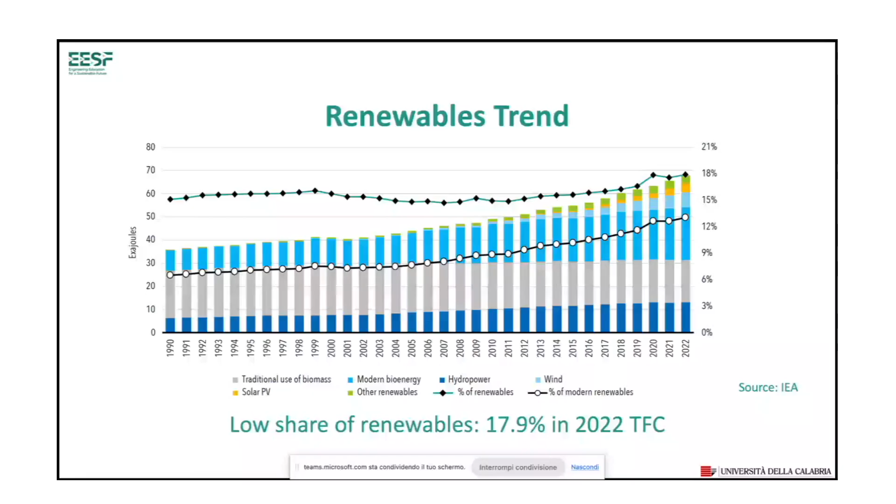In this context, the global contribution of renewable sources in final consumption is greatest for electric generation and corresponds to about 30% for electricity, while heat represents the largest energy end use worldwide, accounting for half of global final energy consumption.

But the sector remains heavily dependent on fossil fuels that satisfy about 80% of the global thermal demand, while renewable sources reach about 21%, and traditional uses of biomass correspond to more than half of this percentage.

The transport sector is the end-use sector with the lowest renewable energy penetration, corresponding to only 4% of final energy consumption in 2022. And in this context, liquid biofuels provide 90% of renewable energy consumed for transport, with most of the remainder coming from renewable electricity for vehicles and trains.

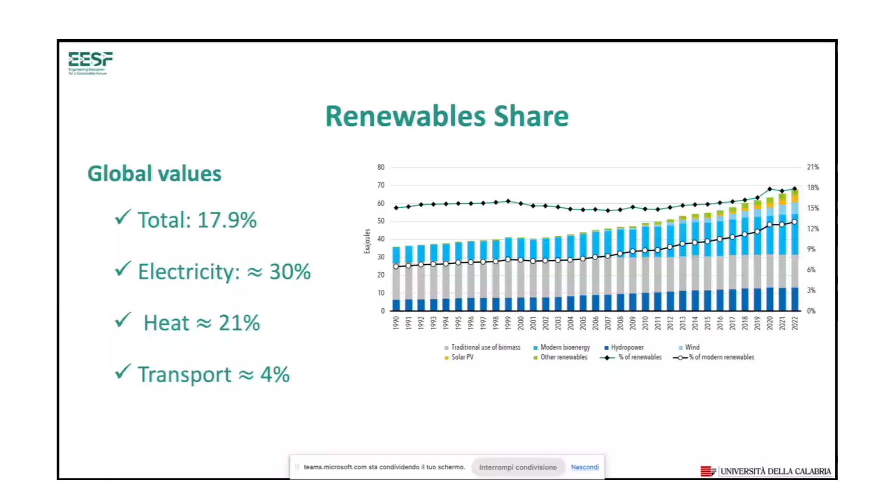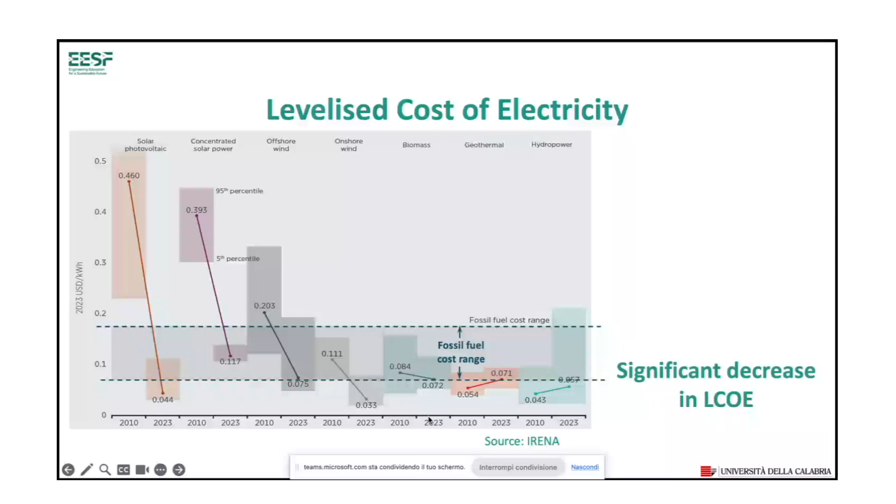And this other slide, always from IRENA, confirms that the 2022 fossil fuel price crisis has shown the economic and security advantages of renewable power generation. And the last years have registered, in this case, among the highest rises in the competitiveness of renewables, as visible in this slide.

Just as an example, in 2010, if we consider onshore wind, the levelized cost of electricity was about 126% higher than the corresponding lowest value of fossil fuel-fired power plant production, while in 2023, the worldwide levelized cost of a new onshore wind project was about 67% lower than the cheapest fossil fuel. This is the fossil fuel cost range in the period that we are considering, between 2010 and 2023. And it is interesting to notice this significant decrease in terms of cost.

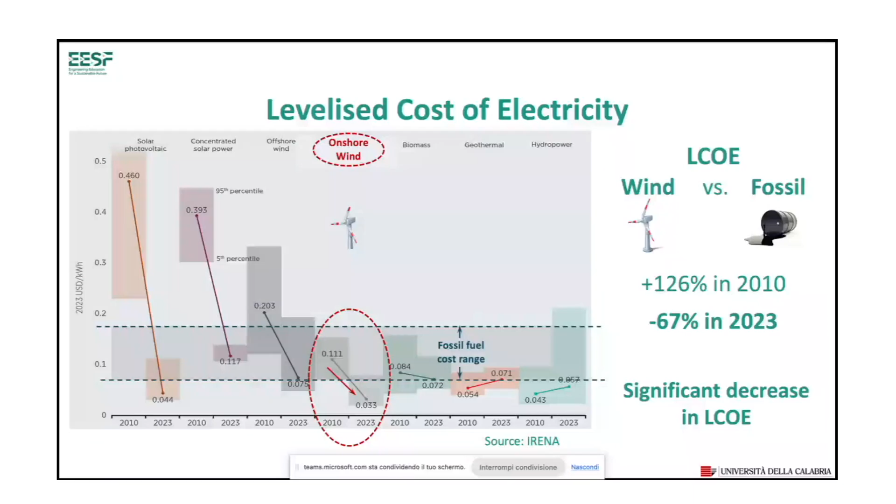And similar results are visible for photovoltaic systems that have reached higher improvement. We move from costs that were about 400% more expensive, this is the value corresponding to the minimum values of a fossil-fired solution, and now they are about 56% cheaper than the lowest fossil fuel system in 2023.

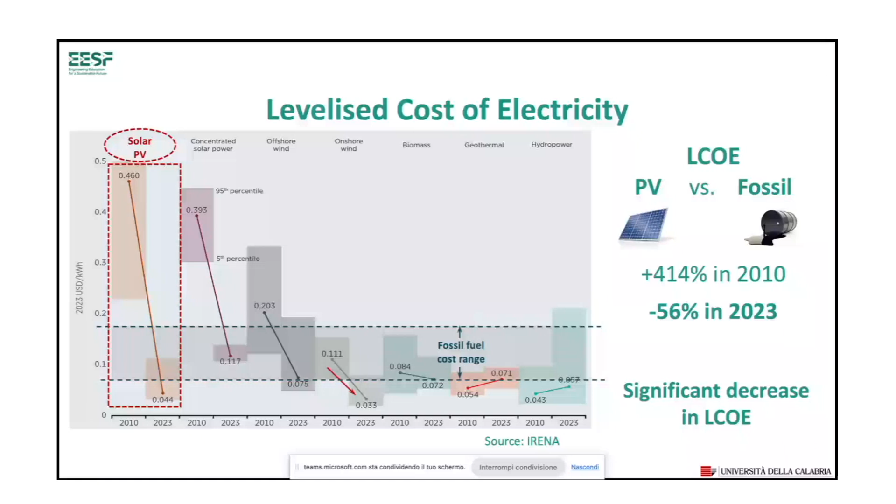And the results highlight also that renewable sources reduce the economic cost of exposure to volatile fossil fuel prices, reducing the need for traditional fossil sources and their import. For 2023, the renewable power deployed globally since 2000 saved about 500 billion US dollars in fuel costs in the electricity sector, with the main share from Asia with about 200 billion and Europe with about 90 billion. And the main energy comes from onshore wind and hydropower.

As already introduced, the second pillar to promote a proper and effective energy transition and to guarantee a sustainable and green future is based on increasing energy efficiency. Energy efficiency, in fact, reduces overall energy consumption and is then crucial to achieving the climate ambition, enhancing present and future energy security and affordability. Saving energy represents the most cost-effective solution for a more climate-friendly energy system.

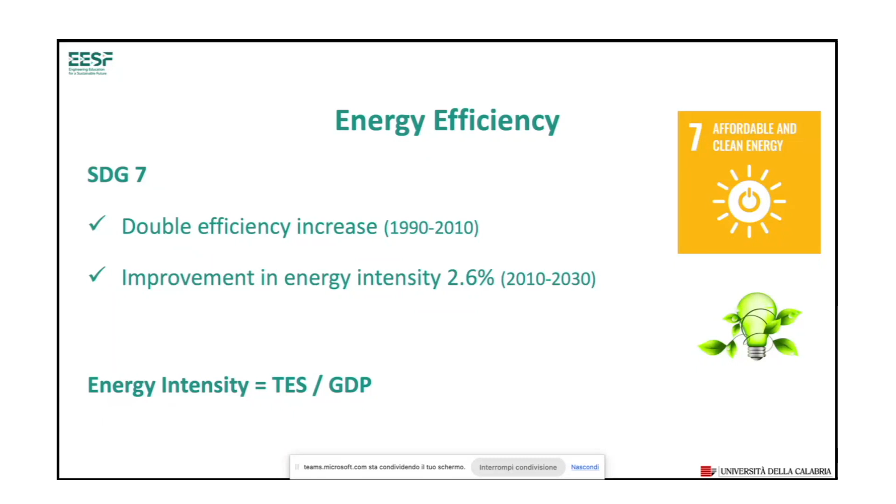And the Sustainable Development Goal number 7 target aims at doubling, as already said, the global rate of improvement in energy intensity over the average of the previous 2 decades. And this corresponds to improving the energy intensity by 2.6% per year in this period, with respect to the period between 2010 and 2030. I remember that energy intensity is the ratio of the total energy supply to the annual gross domestic product. In other words, it represents the energy used per unit of economic output.

And in this context, the role of a university is fundamental. University and education are powerful actors in the sustainability transition. University, in fact, can develop new ideas, high efficiency technologies, for example, solar cells, batteries, and materials. Provide open data for research and innovation, explore policy models, and stimulate critical thinking. But the most important contribution of a university to sustainability is preparing people, as already introduced during this morning. People that represent the scientists, entrepreneurs, policymakers, and citizens who will lead this transition in the future.

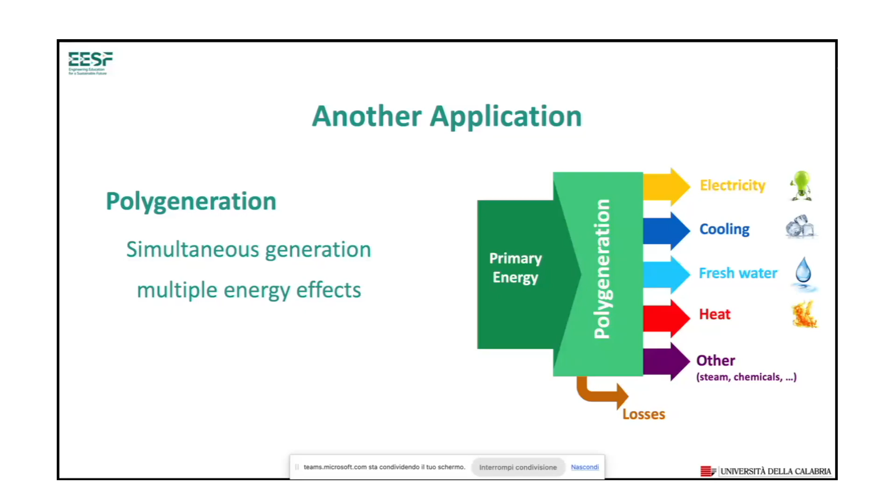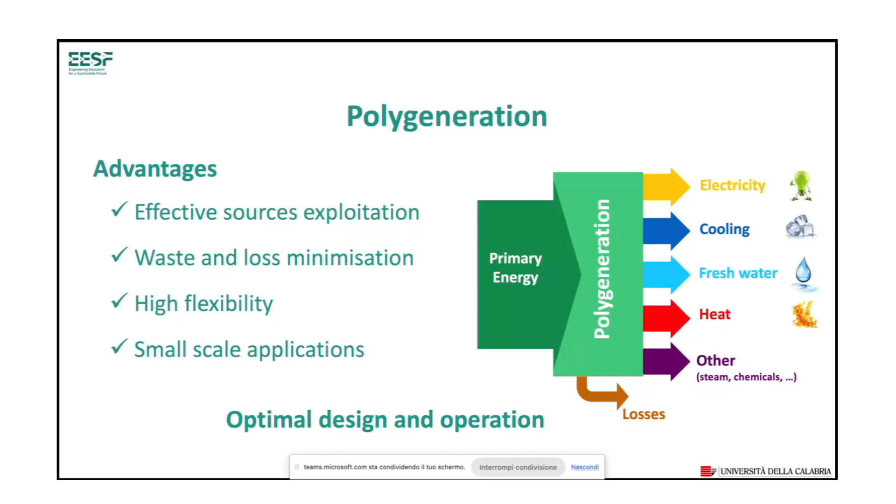But despite their high potential, polygeneration systems are not fully grounded in the energy sector, providing only about 10% of the global power generation. And to achieve the high expected potential of polygeneration systems, the definition of the proper configuration and operation of the system is mandatory. This means that appropriate energy devices with the corresponding capacities should be selected, also considering rational operating strategies in the system operation. And for this purpose, in my course, I typically propose to my students a recent study concerning the optimal design, synthesis, and operation of combined cooling, heating, and power systems.

The case study is used as a reference to evaluate the potential of polygeneration and renewable sources integration to improve the global energy efficiency, economic viability, and environmental performance in real applications. And the students should propose new alternatives and solutions to improve the global sustainability. In particular, this investigation focuses on small-scale applications that present a lower spread than medium and large-scale solutions due to the current technical, economic, and legal constraints and require more attention.

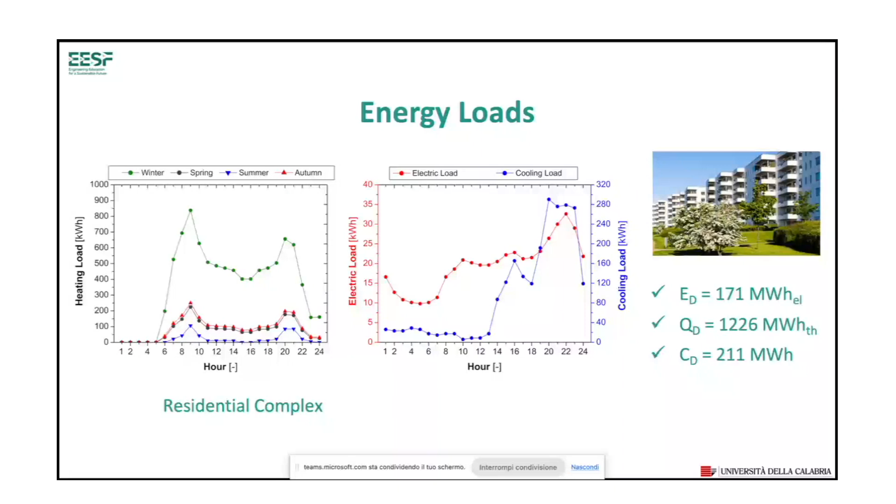In this case, the proposed polygeneration system consists of different units, photovoltaic modules, and gas-fired cogeneration units to satisfy the electric demand of end users, while auxiliary boilers are used to integrate the thermal production when the CHP, the cogeneration unit, is not sufficient. Electric and absorption chillers are adopted to meet the cooling demand, and thermal storage units for cold and hot power are used to improve the global performance of the CCHP system.

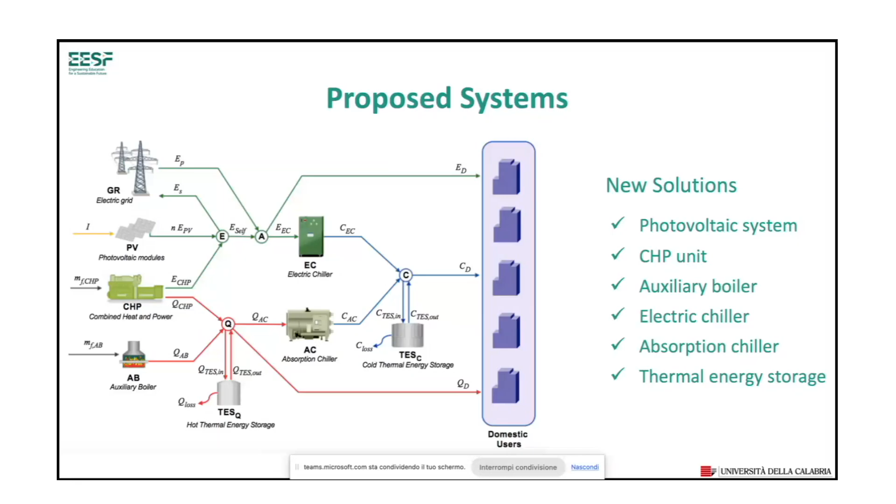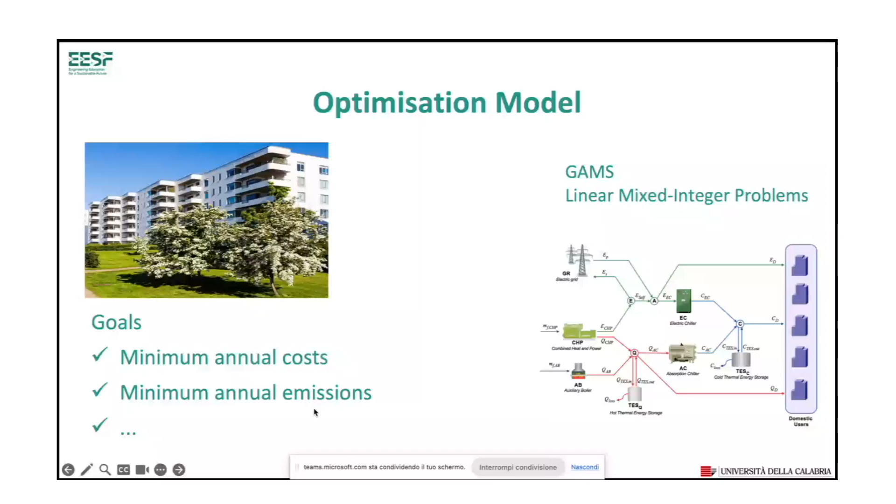To define the optimal design operation of the integrated system, a numerical model is developed, integrating 2 conflicting criteria related to minimization of the costs and the greenhouse gas emissions on a life cycle basis. For this purpose, a bi-objective structure is used. In this way, we consider greenhouse gas emissions for the production, maintenance, recycle, waste disposal of the different polygeneration subsystems, as well as for all the apparatus operation and primary energy sources consumption. At the same time, the total cost takes into account the capital investment, the operation and maintenance, and the price of the energy vectors, also considering their time variation.

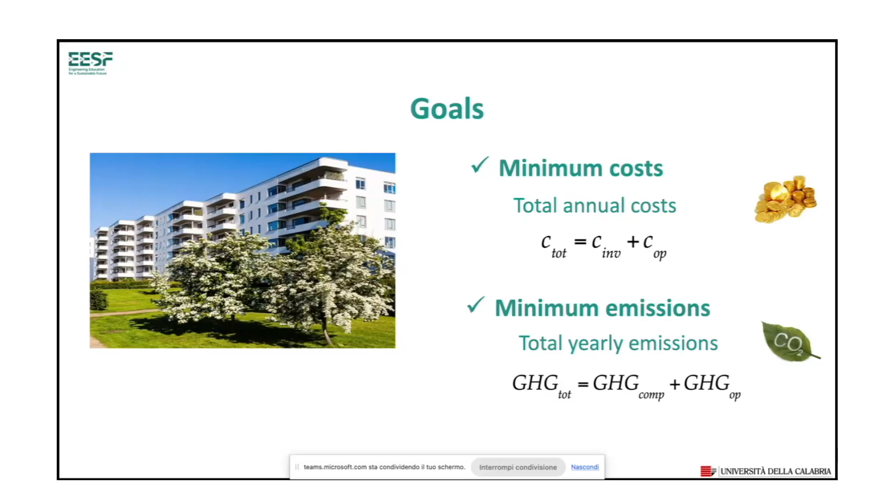Depending on the relative importance of the cost and environmental criteria, the model provides useful insight on the technologies and capacity to be installed, and defines the proper operating strategies capable of satisfying the energy request for specific applications. As an example, the weight factor or lambda, this is the objective function that takes into account cost and greenhouse gas emission. When the lambda factor is 1, the economic target has priority, while when the lambda is equal to 0, the environmental target is fundamental. Intermediate values reflect different importance given to the 2 economic and environmental targets.

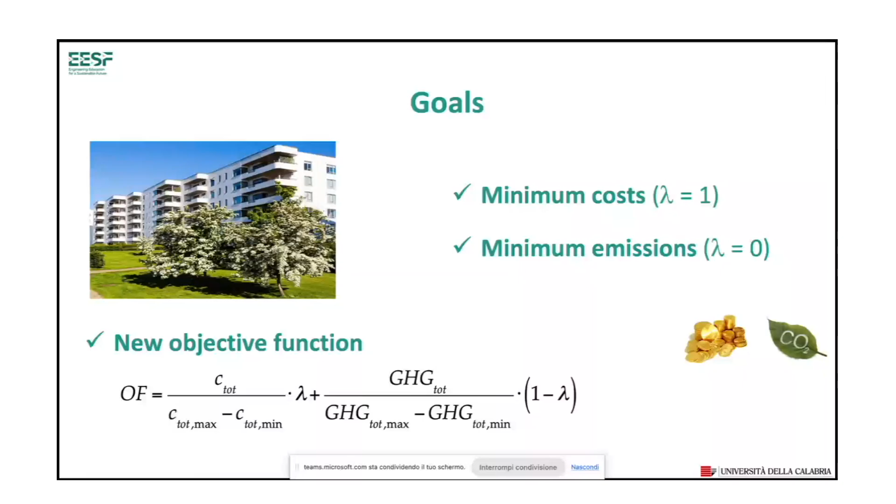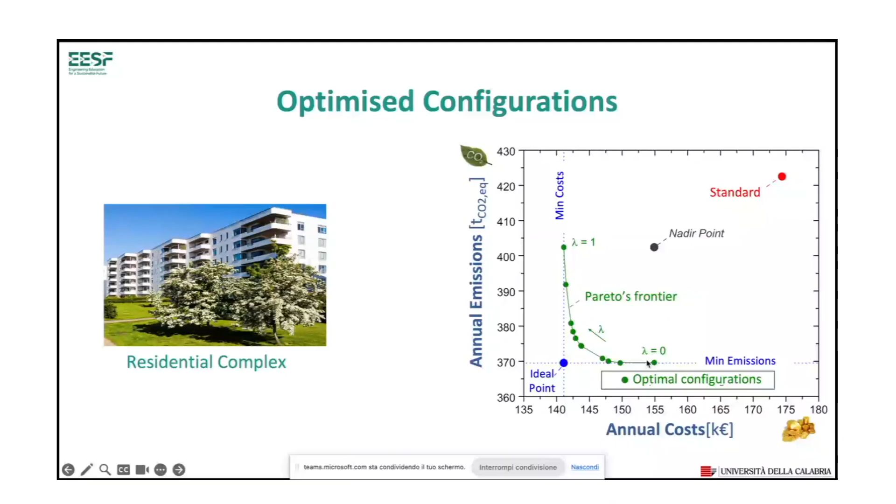The results are summarized in the plot as a function of lambda values in terms of annual greenhouse gas emissions and annual cost evaluated on a life cycle basis. The figure highlights the optimal configuration, the corresponding Pareto frontier, the line in green, the ideal point, the circle in blue, and the reference scenario, the red square. The reference case refers to separate energy production. This means that the sole electric grid satisfies the electric demand of users, while gas boilers and electric chillers fulfill the heating and cooling requests respectively.

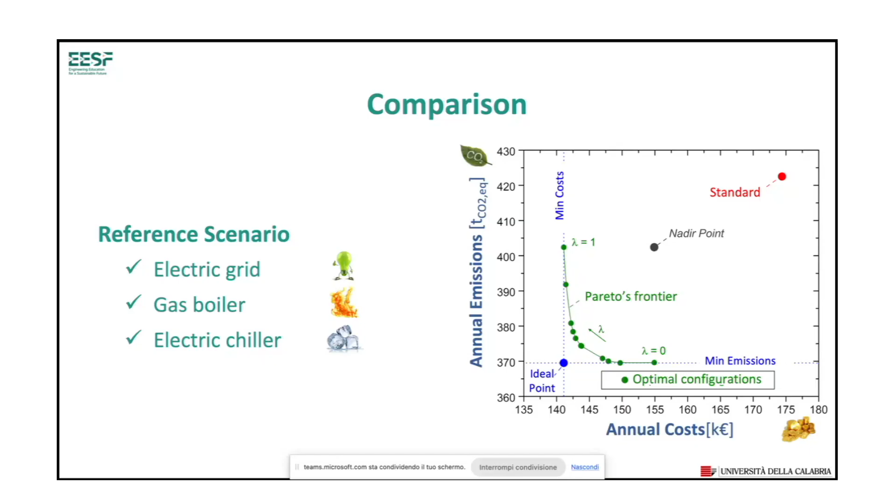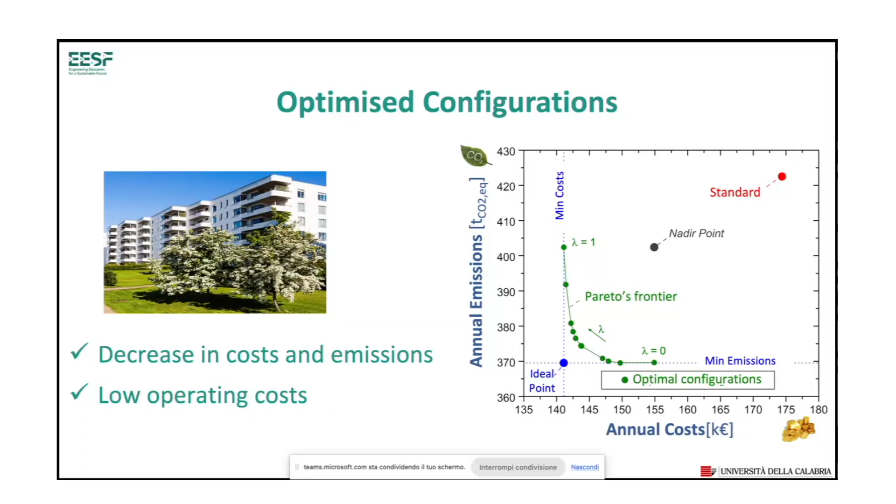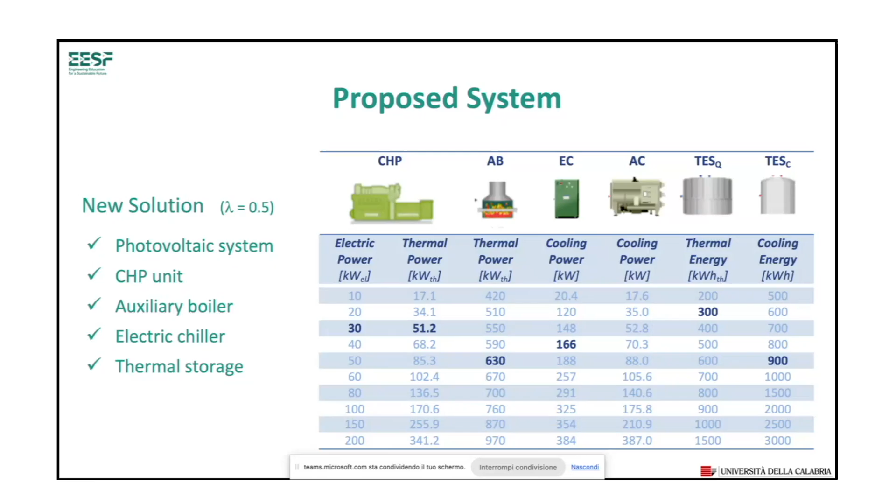The optimal design, synthesis, and operation of polygeneration systems assure interesting improvement in the energy, economic, and environmental performance of a combined energy system compared to the separate energy production. The integration of different technologies and exploitation of renewable sources can drive an efficient transition to sustainable and clean energy solutions. To this purpose, a comprehensive and multidisciplinary approach based on the LCA technique is fundamental to properly account for all the life phases of integrated energy systems, from the construction and installation to the operation and final disposal.

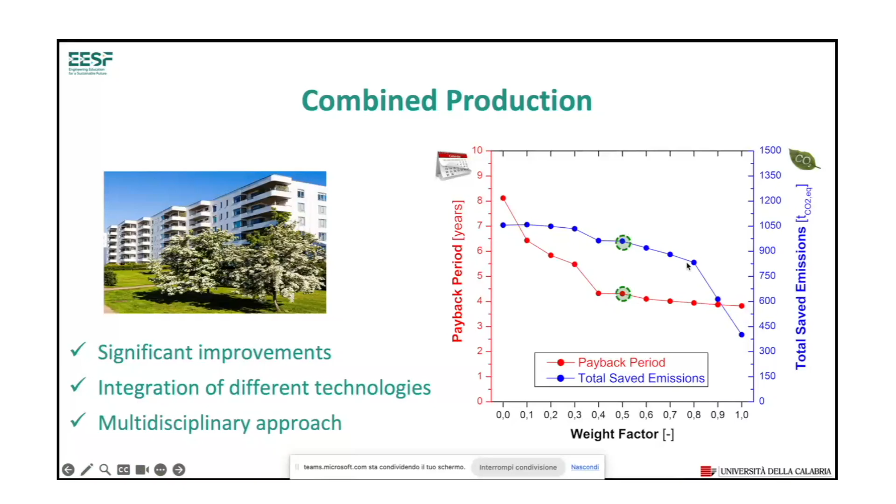At this point, I conclude, remembering that the efficient exploitation of renewable sources and the development of innovative and efficient energy systems represent the cornerstones to promote a faster and softer transition away from fossil fuels and traditional technologies, and that the role of universities and engineering education is crucial to guarantee a cleaner and more sustainable future. That's all, and thank you for your kind attention.